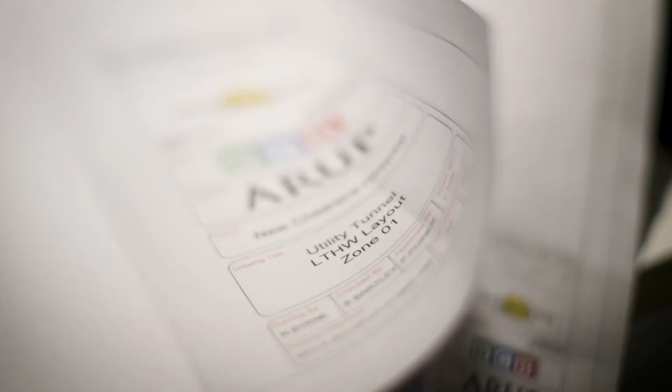I heard people say that this couldn't be done. It'd be an almost impossible challenge to do what we had to do. But our job is to make that possible.

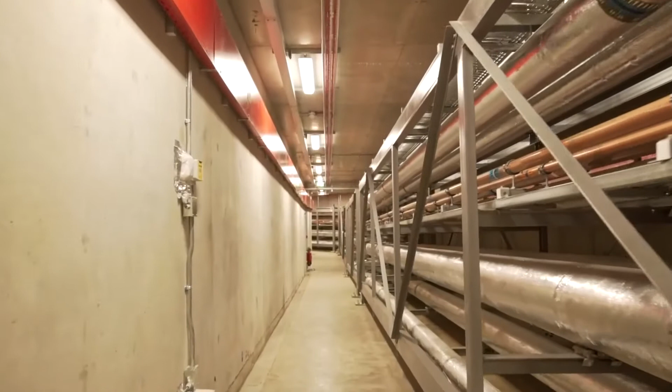When you're finished the project and the hospital opens and you stand back and you look up at it, particularly when you look up at this hospital now, and you say, I was part of that, it's really something actually, and it feels like you're leaving a bit of a legacy behind. So I'm happy to keep doing this potentially for the rest of my career.

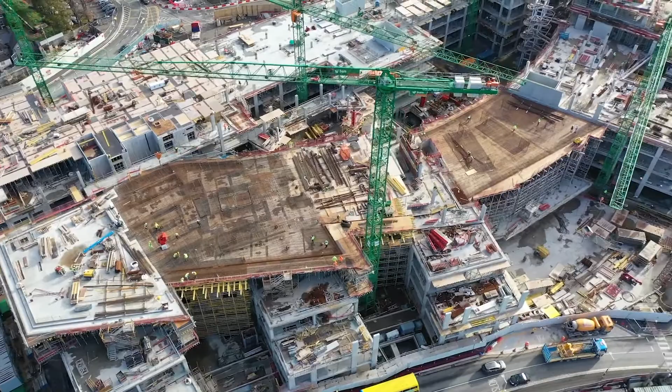It's a long journey, but in the end, you just have to think about what the finished product is going to be and how wonderful it'll be. This is a standout project in the career of any engineer. You get a sense sometimes of how important what you're doing is.

Ultimately, our client is the children of Ireland and everybody in Ireland, their parents as well. I have young kids myself, and the facilities that are there for them at the moment are not really what we would like them to be in this country. So that's really why we're doing it.

Someone asks you, what do you do? Oh, I work in the children's. Oh, the new children's hospital. Yeah, everybody knows what it is, and though they may not say it, everybody knows how important it is. I think they talked about building a new children's hospital in Ireland for 40 years or so.

And I've always loved healthcare work just because of that. It's complex, it's technically challenging, but also it has that social usefulness aspect to it. You very much feel when you're building a hospital that you're doing something that's for the greater good.

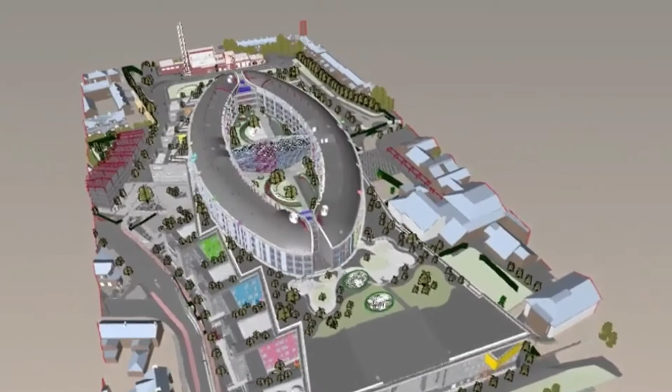But you get a sense sometimes of how important what you're doing is and what it will be, and now you see the building coming up higher and higher out of the ground. You get a sense of how grand it will be when it's finished.

So what Jones Engineering bring to this project is, number one, we bring experience, but more than that, we think we bring a culture, we bring passion, and it's a passion to solve problems. It's a passion to get things done right the first time, to come up with a better way to do things. We're always looking to see, can we innovate and can we come up with a smarter way to do something.

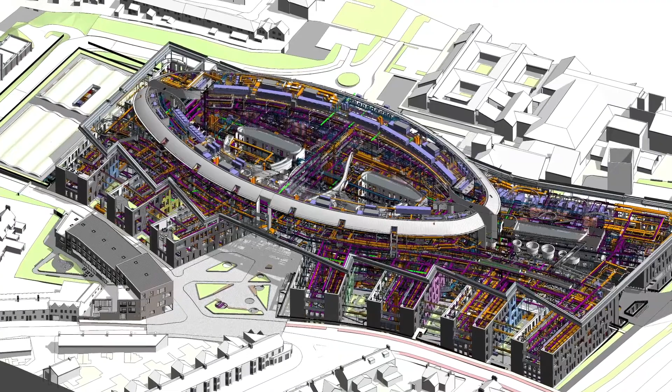But it's also a passion to hand over a project that at the end of the day is a world-class facility to the highest standard.

I think my advice to young engineers who are about to graduate is don't limit yourself in what kind of job or sector you've studied your engineering in. They're all quite versatile and flexible. You can switch from one side to another. It is going to take a bit of learning and getting used to, but you're well able to do it. Definitely just don't limit yourself to just your degree and only your degree.

Ultimately, a consulting engineer solves problems. So clients will come to us with problems or challenges. They may want to build a building in a certain place, or a bridge, or design a table, or anything. And it's our job to decide how that might happen.

Can it happen in a cost-effective manner? What are the stages it would have to go through, from concept to detailed design to figuring out a price to production, all of those things. So yeah, ultimately our job is to solve problems.

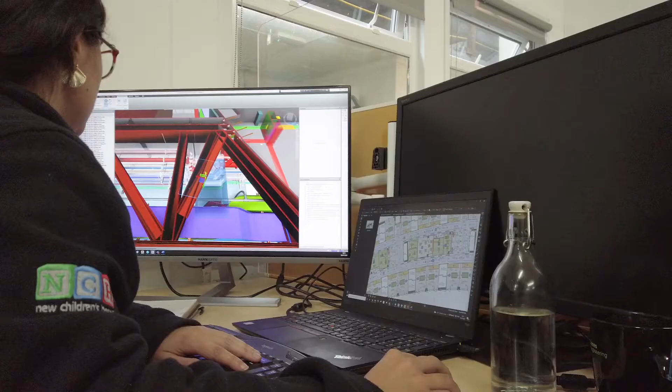I think that many times when we finish college or university we are all very excited about moving into the real world, and sometimes we do believe that we know everything, but it's not really true. Actually, you learn the concepts and you kind of learn how to think, and then you come to the real world, and you are constantly learning stuff.

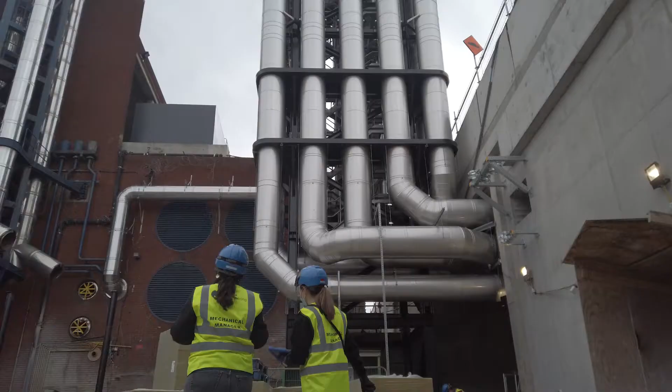And if you have good managers who help you, and we have them here, you will start having small tasks, and then eventually they will start giving you bigger tasks, not really on your own, but they give you that freedom of, okay, you have to do this, any question, let me know, but you have the freedom to do it your way.

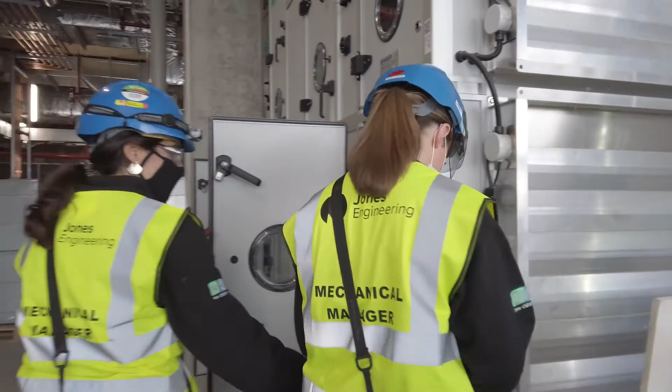You have to learn how to allocate time to different things, because there are different jobs within this project, like as a project engineer or as a coordinator, or you have to be interacting with many subcontractors, different trades. You see that it's a huge hospital, and there are many people involved.

I remember when I was in college, or leaving college, I didn't really understand the different roles that were out there in the industry. You could be a consulting engineer, you could be a contractor, you could be a manufacturing engineer, you could be a technical sales engineer. I had no idea what they were. I didn't know. My first job was a technical sales engineer, and I just saw it as an engineer, you know. And that turned out to be a really interesting job, which I did for a couple of years.

But ultimately, the difference between the roles is consulting engineers predominantly design. It's more office-based. We spend time on site. As you can see now, I'm on site and have been here for quite a while. But predominantly, we're office-based, and we produce designs normally in the form of drawings. And then our colleagues, the contractors, actually take our designs and make them into a reality by turning them into fabrication drawings, constructing them and managing the works on site. So that's the fundamental difference between consultants and contractors.

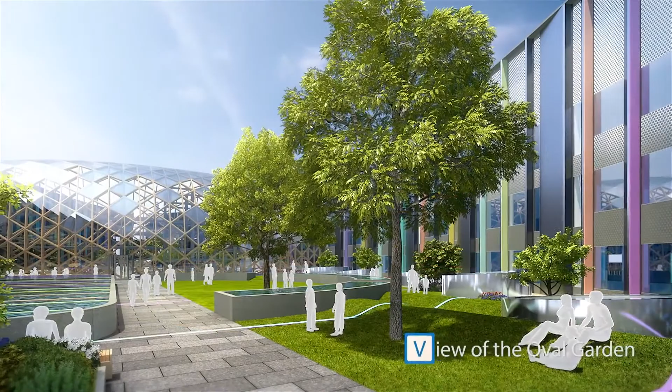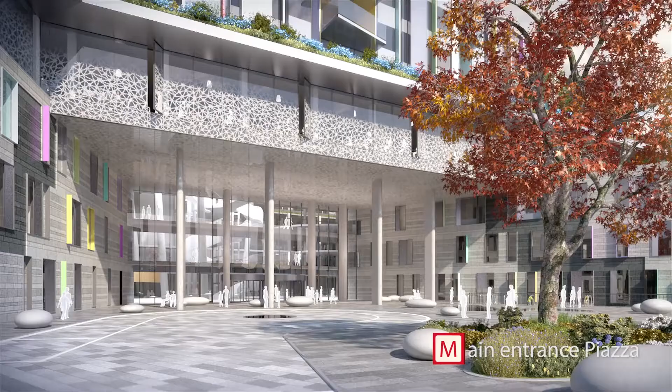And I think it's a departure in the design of hospitals in terms of it's all single rooms, so there's no wards. So there's lots of privacy for the children and for their families, and in each room there's a bed where a parent or a friend can stay the night comfortably, and that's really important as well for children. And the whole design is very much focused on their well-being, with lots of light and lots of outdoor space, and all of that hopefully would help the healing process and help them feel more at home and more relaxed in a hospital environment.

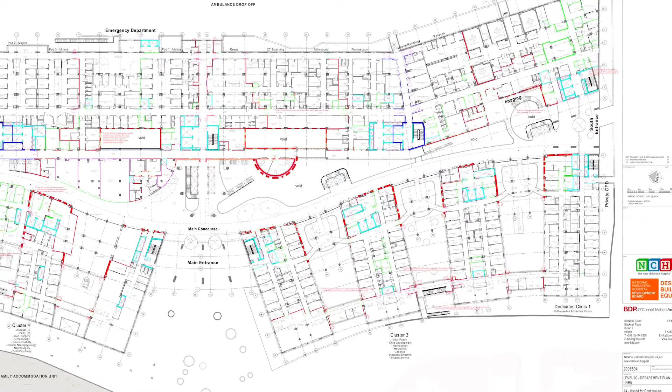So just a little bit about the project itself. I think I mentioned already, I've been personally working on the project for 6.5 years, and I'm really proud to work on the project. I know Arup as a company, we're really proud to work on the project. We pride ourselves as a company that does socially useful work, and no better work to be doing than delivering a hospital. It might sound a bit corny, but I mean that it's really interesting and fulfilling work to do. I could be delivering different types of projects if I wanted, but I've worked on hospital projects for most of my career, and I think I'll continue to work on them for the rest of my career.

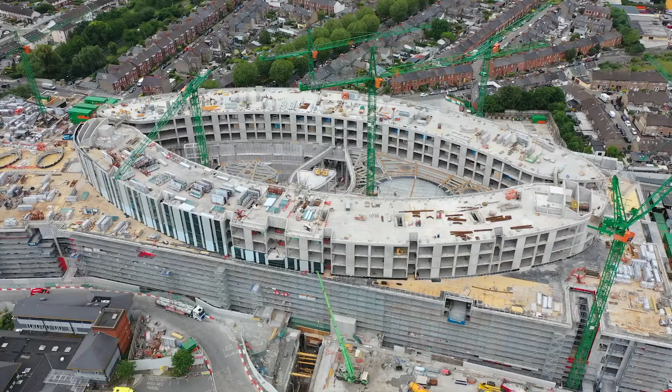They really are interesting projects. They're very technically challenging. They're very complex projects to work on, and when you've finished the project and the hospital opens and you stand back and look up at it, particularly this hospital now, and you say, I was part of that, it's really something actually, and it feels like you're leaving a bit of a legacy behind. So I'm happy to keep doing this, potentially for the rest of my career.

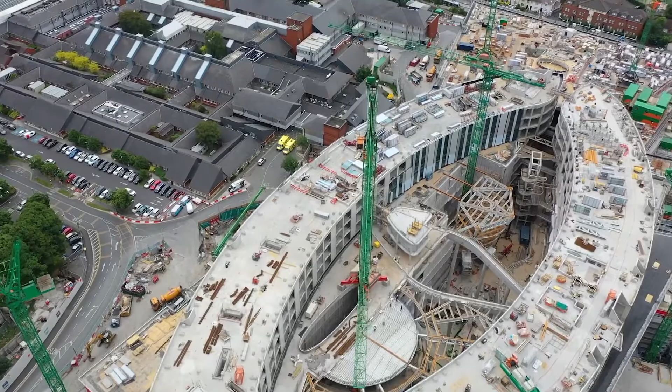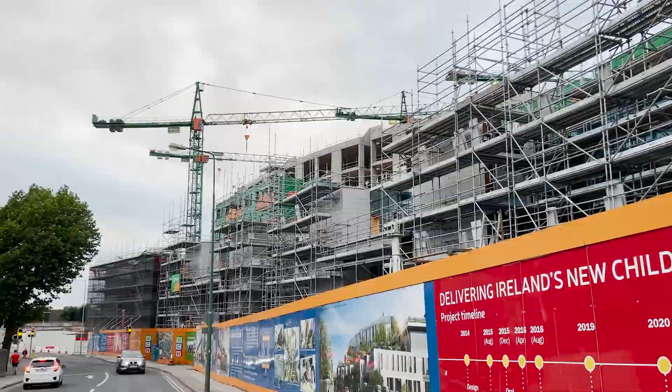The hospital itself, this project, I'm not sure people understand the complexity of it and the enormity of it. The building itself is 160,000 square metres. It's got 6,000 rooms. If you try and imagine 6,000 rooms, that means there's over 25,000 internal walls. Those kind of numbers make the mind boggle. They don't mean an awful lot to people. Your average house, for example, is 150 square metres. So it's over 1,000 of those.

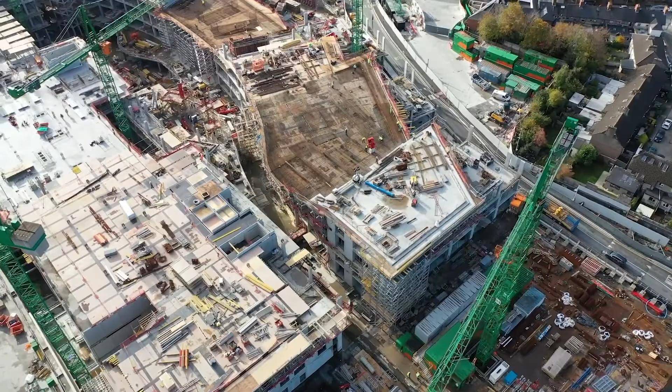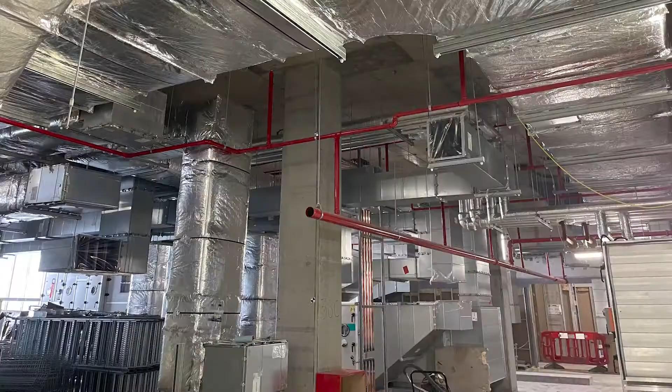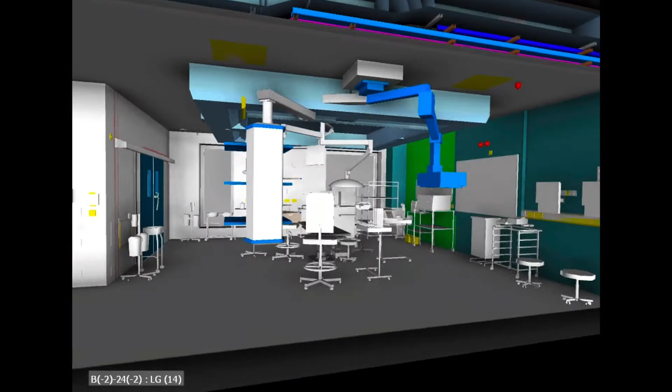So it's our job as designers to design all of those services for the hospital, from the plant rooms right up through the distribution, to get them to rooms so that ultimately patients, who are our ultimate clients, are getting the treatment that they need. The building has over 5,000 rooms. There's 22 operating theatres. There's over 80 isolation rooms. There's 130 air handling systems. There are over 30,000 data outlets in the walls. The building is phenomenally complex and really interesting to work on.

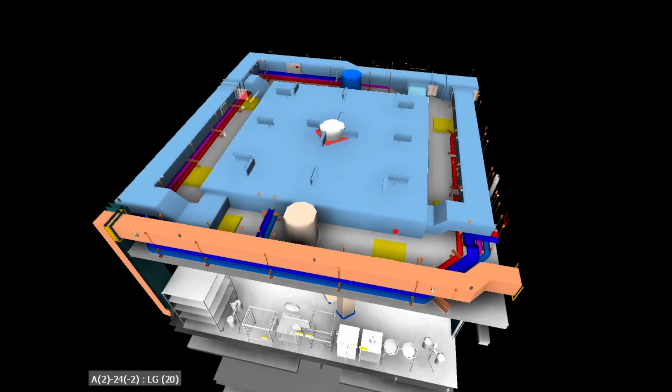If you're an M&E designer, I don't think there's much that a hospital hasn't got. It's got offices, it's got operating theatres, it's got ICT rooms like data centres, it's got kitchens, it's got restaurants, it may have a cinema. It has everything really that you could want to design, and plenty to keep you interested.

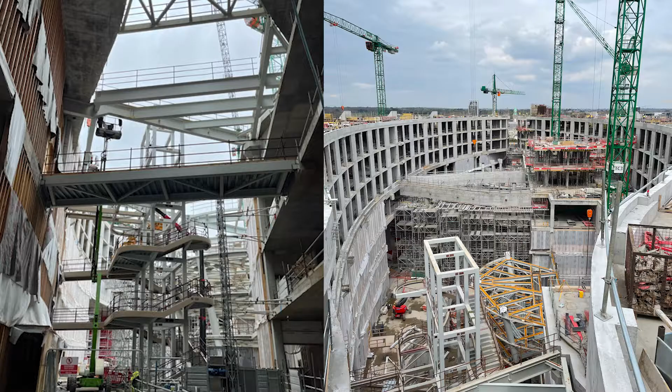So Arup were appointed to start work on the Children's Hospital in 2014, and I started working for Arup on the project towards the tail end of 2014. So it's a really important commission for us, and it's a project that we're really proud to be involved in and committed to delivering. It has been tough at times, but we're really seeing the fruits of our labour now out on site.

The building is now up to level 7, so the structural frame topped out last month, which means that the superstructure is largely complete at this stage. And that's something to say as well.

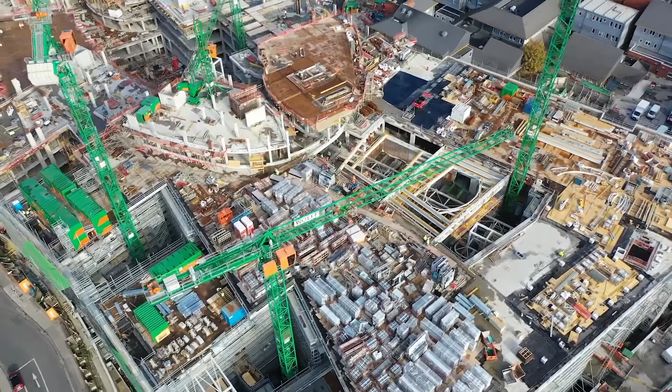Over the years, we've had plenty of social events. The team working on this project, the guys in this building, as well as our own office and in BAM's and Mercury's offices, we've all been working together for a long time now. And we're okay, we have our disagreements, but we work together well the majority of the time, and we really enjoy it.

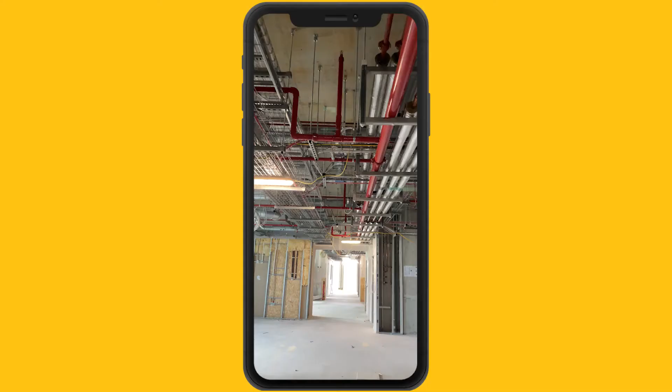So the M&E fit out now is reasonably well progressed. It's probably 20% through at the moment, and there's quite a way to go, but there's a lot of activity out on site now, so it's quite an exciting time to be based on site. And as you can see with the Luas going by now, that's one of the things we have to deal with.

Yeah, so the location here was certainly challenging in terms of the footprint that was available for the building, and it was well, I suppose, publicised that there was doubts about the site and whether it was the right site for this building. And it's not our role or my role to question the site itself or the location of it. It's our role to come up with solutions to make the building work on the site, and in fact to make the site work for the building as well.

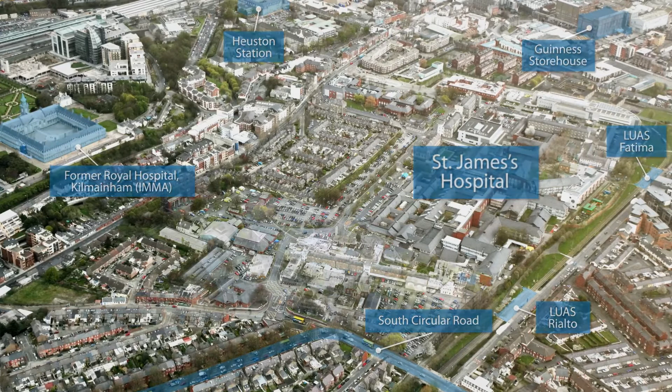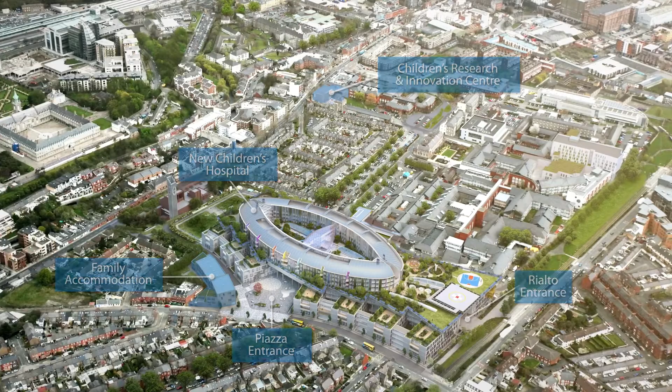The site, obviously, it's a live hospital campus. So there's hundreds and thousands of patients coming into this site on a daily basis, and St James's Hospital could not be affected by anything that we had to do. We couldn't shut down the hospital or any part of it. They had to provide service to patients 24/7, as they do always.

And the really unique part of the piece of work that we're going to talk about today is there was a utility tunnel that connected the St James's campus to its energy centre, which is, if you think about it, almost like an umbilical cord, and it transfers all of the critical services from where they're generated to where they're needed. So that's power, keep the lights on, keep all of the machines on, it's heat, it's steam, it's medical gases, it's oxygen, that people are acutely aware of how important oxygen is these days, and nitrous oxide,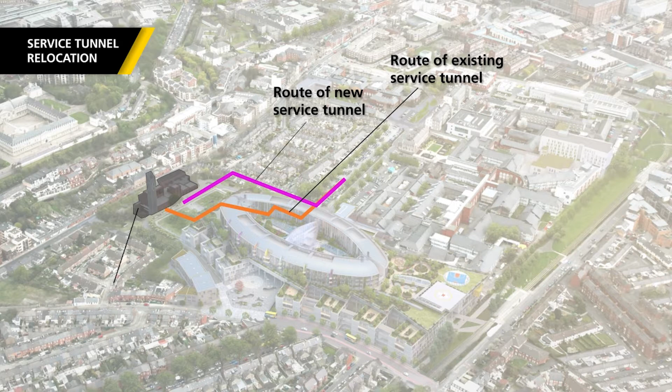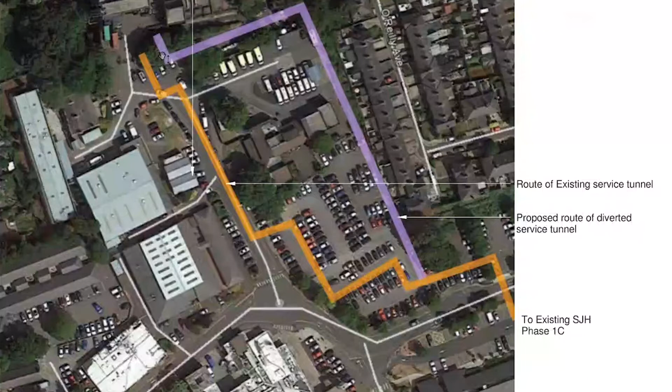and various other critical services. And the problem that we had to work together with Jones Engineering to solve is that this tunnel ran through the site for the new Children's Hospital. It ran underground and directly through the route where we needed to excavate to get this building started. So before we could even start, we had to crack this particular challenge. Initially, it's about coming up with a concept, right? So that's really our role at the start.

I heard people say that this couldn't be done. I'm pretty sure I read it in the newspapers actually, that this couldn't be done, that there were so many critical services, the Drimnagh sewer and the utility tunnel running through this site, that it just wasn't suitable for this hospital, and it would really be an almost impossible challenge to do what we had to do. But our job is to make that possible, right?

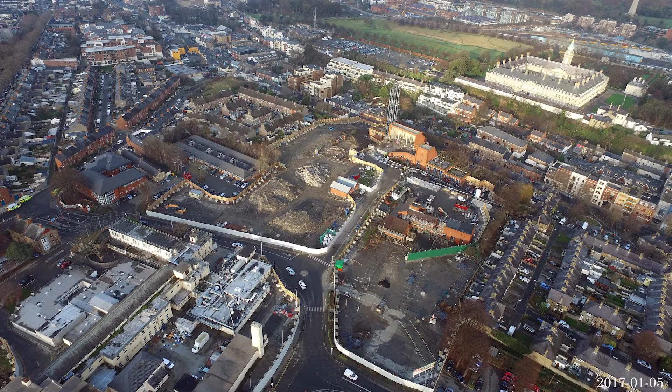The first thing that we do is we go and visit site. So it's hard to imagine, but there was a first time that I visited this site, and it was about 6.5 years ago at this stage. It was cold. I remember there was 22 old buildings on the site where the hospital is being constructed now, and there was obviously this utility tunnel running underground through the hospital. So the first thing we do is we go out, we survey the site, we familiarise ourselves with where everything is, where everything connects into.

Obviously we bring in some specialist companies to help us survey underground to try and figure out where everything is going, where it starts, where it ends, and that allows us to build up a picture of what the specifics of the problem are.

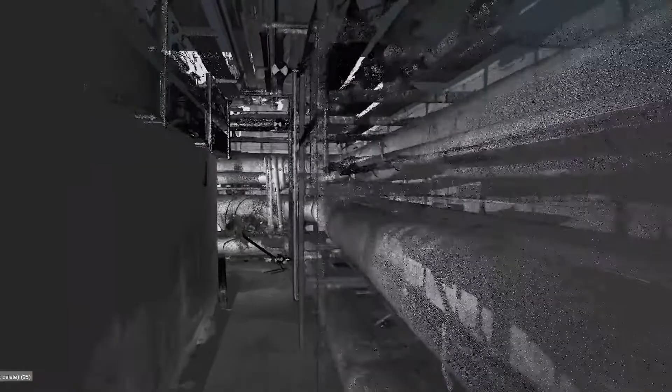And I often think it's almost like a photograph that has very poor resolution. So we start with a concept which is the bones of a solution. It's not very detailed, the resolution is not very good, and as we move through the stages of the project, the resolution gets better, gets better, gets better. So we learn more, we provide more detail, and by the time we get it to the stage where it's ready to be constructed, we've got pretty much all of the detail. We've got everything that the contractors need to build.

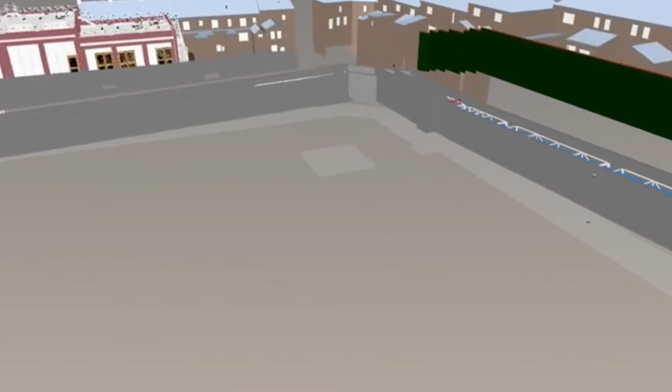So yeah, there would have been an initial information gathering stage, let's call it that. And ultimately, if we imagine a situation where we have an underground tunnel running through a site that we need to clear, I think any of us here could come up with the initial concept. The tunnel has to go around the site. So we looked at a couple of potential routes as to where it would go, and we decided pretty early that the tunnel needed to run east to the northeast corner of the site, and then south to join back up outside the footprint of the new Children's Hospital. And so that was the initial concept 101.

What we had to do then is try and understand, okay, now I've got an idea, is it feasible? So we need to produce what people refer to as a feasible generic design. So it needs to work, it needs to be possible, and it's based on generic components. So we can't specify it must be that exact type of machine. We've got to be able to do it in generic terms so that the contractors can procure from different sources. Okay, that's something we have to work within.

So now we've got an idea and we start to develop: are the levels correct? Can we get the tunnel physically far enough underground, and will it bump into anything as it's coming along that route? And if it does, how do we divert that? So we go through a whole stage of working with other consultants then. We work with the architects, the civil engineers, landscape engineers to try and figure out if our initial concept is actually feasible.

So where could we start the tunnel? It obviously needs to come out of the energy centre, because that's where everything is generated. So is there a part of the energy centre that's in the right place where we need to come out? Is the energy centre deep enough to come out? The levels are the slopes and the depths of the ground and so forth. The new building was obviously going to have quite a big basement, and we needed to come out very low, much lower than the existing tunnel was.

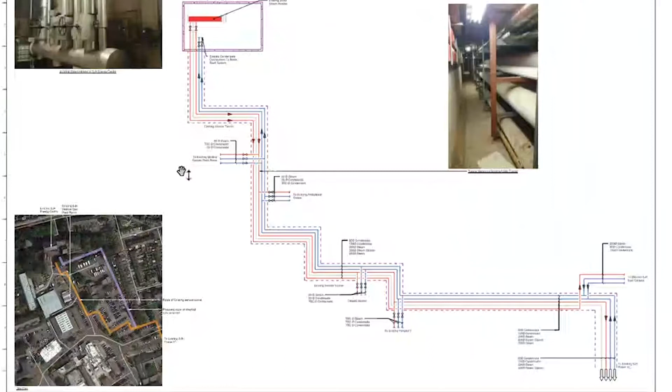And so we had to survey the St James's Energy Centre to see, is there a part of that building that's low enough that we could feasibly break through the wall from underground and create a new tunnel and connect everything back. And we determined there was, we picked a location, and we came up with an initial set of concept design drawings, which we used predominantly to agree the scheme design with the key stakeholder at this stage, St James's Hospital campus, because they own the services, they're keeping their hospital live, we're doing open heart surgery on it effectively. And we needed to get their agreement with everything that we had to do.

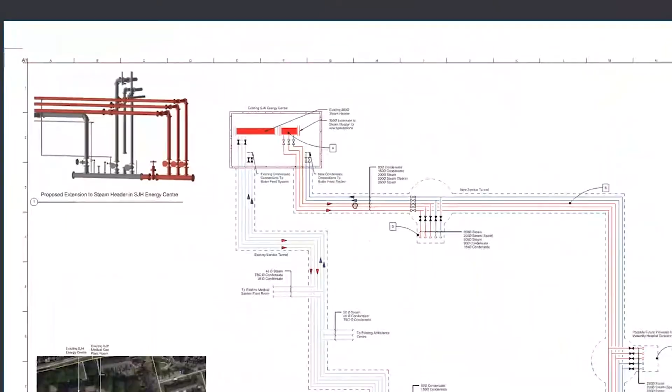We produced an initial set of concept drawings for all of the main services, so for the electrical services, steam, medical gases and so forth. And we set them up in a way where we showed schematically existing, next page would be proposed intermediate stage, and the next page would be the final stage. It's very basic, but you could flick from one sheet to the next on a projector, and it was very clear to this client what was changing at each stage.

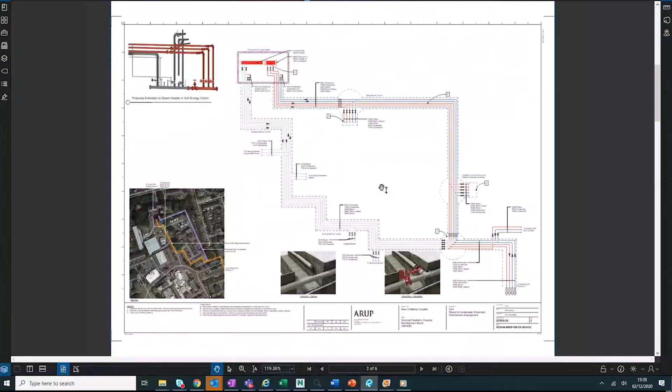So we would add a new bit, we would make a connection here, we would run services here, we would make a changeover at this point. And we had to demonstrate to St James's that we could do it in a way that would be safe and that it would not cause an interruption to their operation of the hospital. That was just a no-go. We could not interrupt the services.

And we had to give them confidence that we had designed it in such a way that this could be carried out as we had designed it. So we sat in long rooms like this with our drawings up on the screen. All of the people from the St James's Technical Services departments, their Director of Capital Projects, all of the key people over there, including clinical people as well. So you would have some of their clinical engineering leads and people who understood what it meant if their oxygen supply turned off, for example.

Yeah, so to give the St James's team confidence that the solution that we had come up with was buildable and could be implemented in the timeframes that would avoid any downtime on their systems, we collaborated with contractors prior to having the meetings, and we were able to demonstrate that we had thought through the turnaround times for controlled shutdowns and for switchovers between one service and another service and backup services and that type of thing.

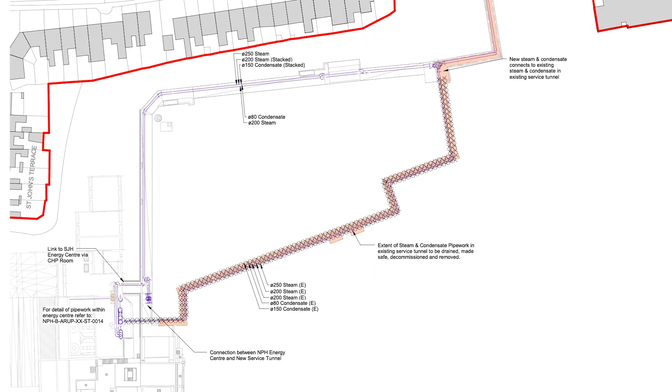And with public projects, the way they're procured, you've got to advertise it online. You let contractors tender for it in a fair way. And we need to produce a very detailed set of design drawings now, or tender drawings as we refer to them, so that all of the contractors get all of the same information and that they get a period of time to assess those drawings, measure them and come back with a price.

So all of the contractors submit their prices for the work, and the contractor with the most economically advantageous tender wins the project. So not necessarily the cheapest, they have to demonstrate that they've thought through the methodology of how they're going to approach the works, and they get points for that, as well as getting points for having an economically attractive tender as well.

So we need to take our concept drawings at this point and develop them into something more detailed. So we need to add all of the valves, we need to add all of the right pipe sizes, we need to add all of the material specifications, we need to add all of the accessories that aren't necessary at concept stage. So when we're agreeing a concept with the stakeholders across the road, they don't really mind if there's 2 sets of expansion bellows or 1. They just know you've got to have them, you've got to have thought that through.

But for tender, you've got to have designed all of the valves, all of the accessories, so that they can be counted and all of the contractors can price them in a fair and an equivalent way. So it's taking the concept and it's developing it into a detailed set of drawings that plugs all the gaps.

And as well as your drawings, you produce specifications, which are documents which list out all of the material specifications, all of the constraints, all of the duties that the contractor must carry out, everything which will cost money effectively, and everything which is required to complete the work. So we prepare a big pack of drawings and documents, mechanical and electrical, which go together and they're sent to the contractors to price.

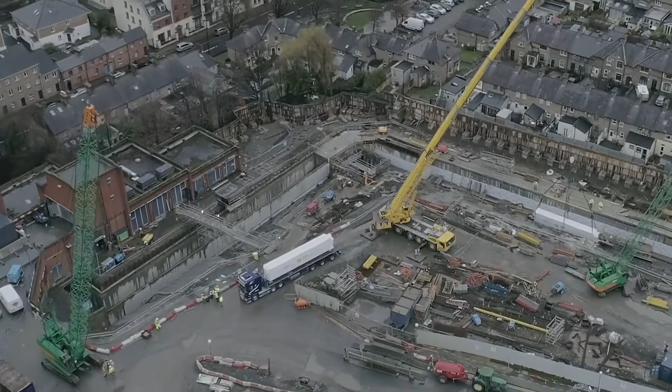So currently we've a team of about 350 people working on the project, and it's this team of managers and engineers and craftspeople that actually make this amazing project possible. I had worked with Jones Engineering on the St. Vincent's Private Hospital project a number of years ago, and that was a very successful project. So we were delighted when Jones won the contract on the Children's Hospital, and we knew that the quality of the work in particular would be to the highest standards.

And I think that Jones hold those values. They want to walk away and leave the thing running well and not have any comeback at the end of the day. And again, realize the importance of a hospital project and making sure that everything is working and that there isn't downtime. So I think working with the contractors brings that buildability element.

Sometimes as designers, the kind of physicality of how you actually fit something in, how you put something together and how it fits in the space is not something that we'd be as strong on. And so it's great when the contractor comes to the table and the whole thing starts to become real. And Jones certainly brought their skill in prefabrication and modern methods of construction to the table, and looked at what we designed and saw how it might be tweaked to make it more easily constructible or more easily prefabricatable. So the terminology we use is coordinated.

And the terminology in the industry is the consultant produces feasible generic design. Which, as I said, is a design that can be built, is based on generic equipment, and then the contractor takes that and turns it into a specific set of construction drawings. So it's fabrication drawings based on specific products. So he will actually know exactly what valve, exactly what brand of pipework, exactly what type of pumps and fans and so forth, and they load all of that into the design now.

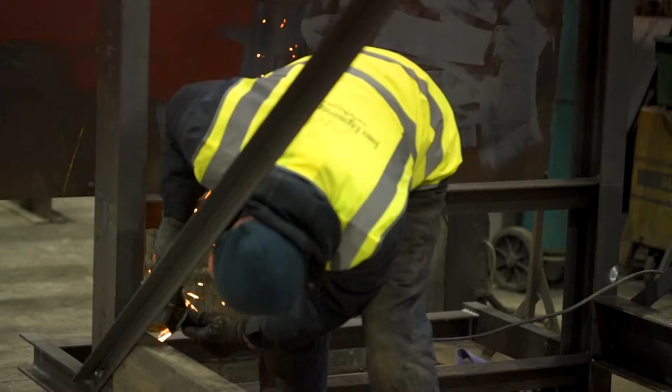And if you take the likes of the utility tunnel that we worked on here, the major concept really was modularization, and that's mainly based around speed. So are you going to just get all the materials delivered here to site, or are you going to actually get them delivered elsewhere, actually put hours in off site and bring finished elements to site? And it sounds slightly trivial, but that's a major decision you're going to make.

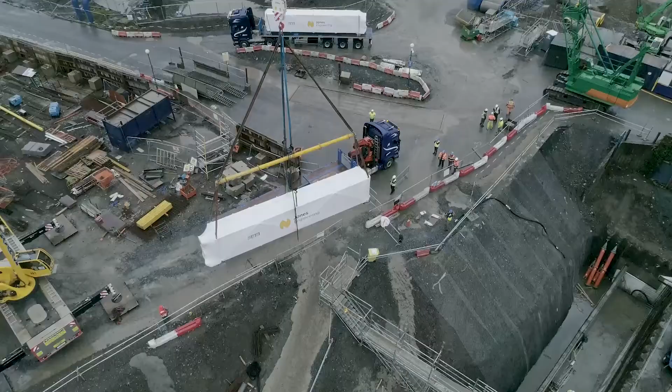You're going to need off-site premises, you're going to need insurances, you're going to need logistics, additional transport over and above. The level of coordination that's required is going to have to be probably an order of magnitude higher, because everything has to come correct. There's no bring it here and sure we'll fix it, but that just defeats the purpose of what you were trying to do in the first place.

So more and more as the industry tends to go in that direction, the more accurate you have to be. People coming straight out of college, there's not really much time to come up to speed. You got to kind of be there from the get-go and get in with a more senior engineer and do your best to play catch up and roll with them. Yeah, so one of the things that we try to employ when we are doing a review of the design is a simplification of it.

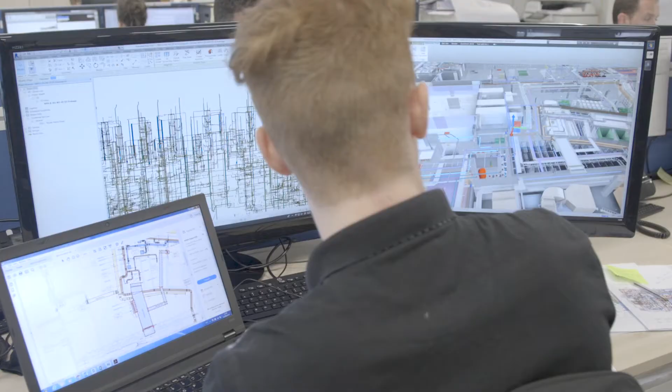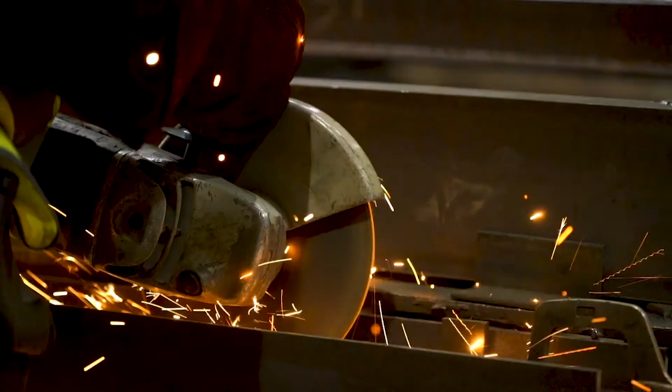A pipe that runs in a straight line is far simpler and easier to install than one that has multiple changes of direction in it. From a cost point of view, but also from a system operational point of view, there are benefits to everyone from a simplification.

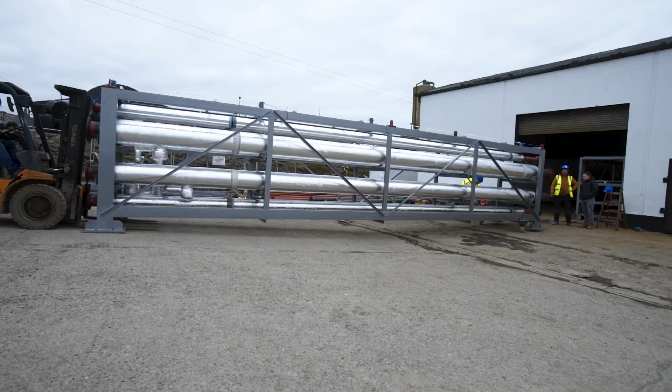And that really leads into how we think about offsite fabrication, where we're endeavouring to provide compact, repetitive items delivered to site, high quality, low issues, and the simpler that we can make these things, the easier it is to repeat them, the fewer issues you can have with them, and that just leads to higher quality and reduced time overall, really.

To facilitate the speediness of the shutdown works, we needed to prefabricate as much pipework as we can. Now, in an already installed environment, it's very difficult to provide accurate prefabrications because you're relying on what you can see and measure and the accuracy of that.

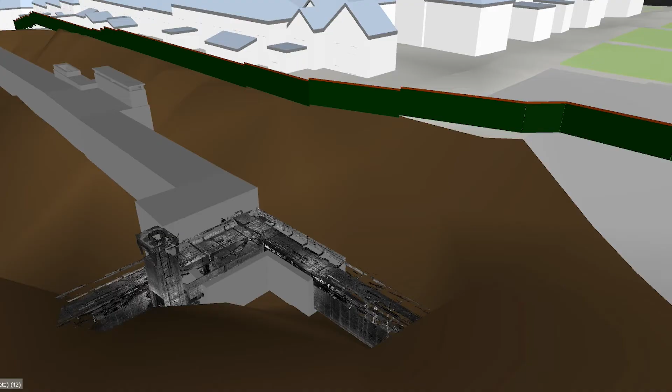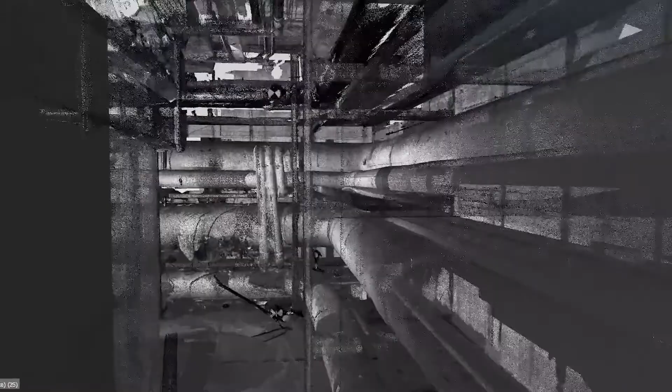So the entire junction where the cut-in was going to take place was 3D scanned with LiDAR, and this provided us with an accurate base point that we could insert into our model on top of that, and we probably saved in the order of 4 to 6 hours of work on site, and that's 4 to 6 hours of real time of a hospital losing their heating system that was saved.

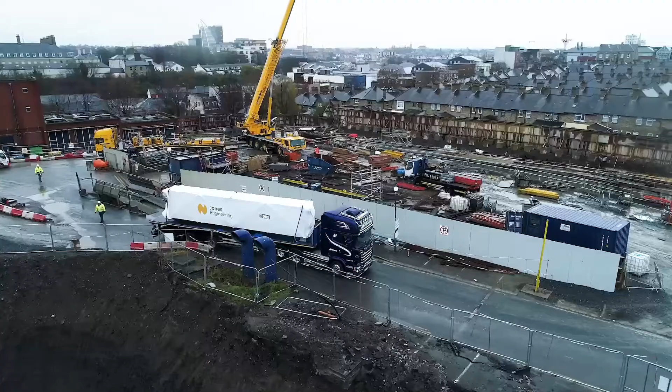So in the case of this project, off-site manufacturing was deemed an absolute necessity over a nice to have, due to a number of factors, the restrictions in and around this relatively tight site, but also, and more importantly, from a quality point of view, where it's far easier to control quality in a controlled off-site fabrication facility, and the number of other factors that go along with that: reduced health and safety concerns on site, reduced issues due to inclement weather.

One of the most critical things that was identified early on was how the diversion of the steam systems would be handled. The steam is used to provide heating to a large part of the existing hospital, as well as hot water services, and as you can imagine, turning these systems off is life safety critical for patients. So it had to be handled in a very controlled manner. This was done through writing a very large method statement document about how the process would be done and how it would impact on the hospital especially.

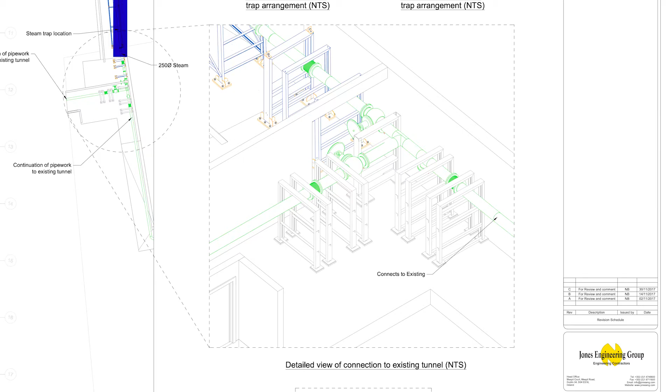There was a location identified where the two tunnels will connect, and at this location we had to cut in several T's and valves to be able to facilitate the diversion at a future point. And this was done over the course of 6 Saturdays, normally on Saturday nights, to provide the least disruption possible. The hospital identified this as the best time of the week to do it, based on the very low number of surgeries likely to happen on a Sunday morning.

So we would shut the steam system down, allow everything to cool down and the pressure to drop. We would then cut into the pipe at the identified location and add in what was required with the additional valves. This typically took in the order of 6 to 8 hours, and we would work through Saturday night into Sunday morning, maybe finish about 2 a.m. So by 8 a.m., 10 a.m. Sunday morning, the heating systems were available again to the hospital.

And in addition to the steam systems that serve the hospital, the utility tunnel is also home to a number of medical gas services. That includes medical or surgical air and nitrous oxide, laughing gas. So these two systems are critical to the health of the patients within the hospital. And one of the critical milestones that we had to carry out was a diversion of these two gases.

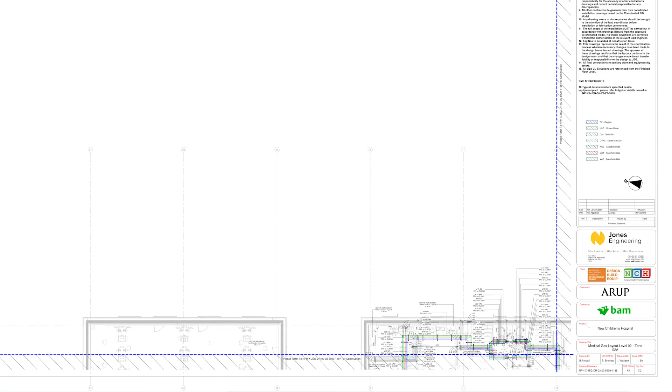So the system had to be shut down, and inside the hospital about 100 cylinders of gas were brought in, and these were all plugged into the hospital locally to provide services to the patients while the works were taking place. Again, in the middle of the night, I think it was finished in the order of 4 a.m. to provide the least amount of disruption to the hospital.

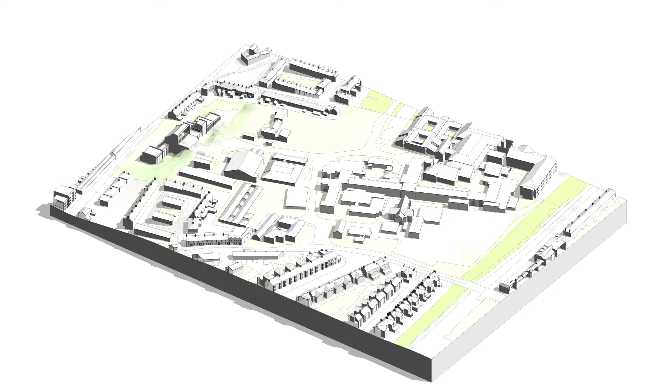The project here is utilising BIM as a resource. More and more the industry is moving towards 3D software as a way to provide accurate installations and reduce issues that arise on site from clashes. And this was the case here.

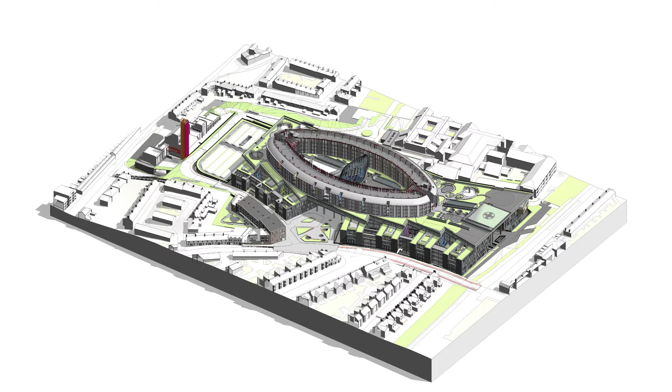The project utilises Revit, but also for the utility tunnel we used another software called Plant 3D to better facilitate prefab off-site. The design concept model that we get from Arup really acts as a schematic, so we know what needs to go where, which is the most important thing to fulfill the design.

The entire services within the tunnel are then each meticulously modelled in 3D, not just the pipes but all of the supports that go along with the pipes. Once it's completed and we're happy that it all works, it flows well and it's as optimized as it can be, it is then broken down into modular sections, drawings are produced for these sections, and then that's taken away and fabricated off site.

But the model, in addition to just providing the information that's required to build it, really gives a level of reassurance and a check on the design that everything works. At the end of the day, a tunnel is a closed box. You can only fit so many things in it, plus you have to fit people in there as well. So it validates at a very early stage that there's not really going to be any fundamental problems on site, and it gives everybody confidence to move forward to the construction phase.

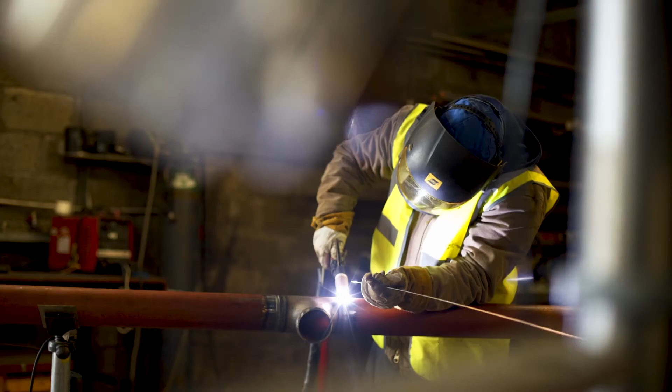One of the key considerations that we have, especially as time goes on, is the reduction of waste and optimization, not just for the environmental sake but also from a cost point of view. So when we look to modularize, we try to use as many standard components as we can. For example, pipe that comes straight from the mills in Asia typically comes in 6 or 12 meter lengths. You can make a module any length you want, but you can end up with a load of offcuts that have to go in the bin. So the actual modules were manufactured around the standard lengths of pipes. It leads to less waste, less work on site, and is beneficial overall.

These models contain so much information, but information is no good if you can't communicate that information. And the currency of communication is still 2D drawings.

In the case of this system, but really in all systems, one of the key considerations for pipe install is how to deal with thermal expansion. In the case of steam, because you're operating at higher temperatures and pressures, this is especially so. The system as a whole is sent out to an expansion specialist, and they provide the critical locations and information about where we should allow for expansion and how we should restrict the pipe movement. Really, it comes down to where you don't want the pipe to move, where you want the pipe to move, and what the loads are going to be.

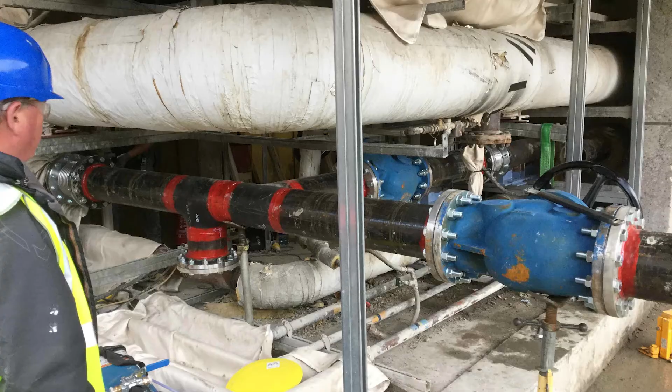A simple example would be where you have an expansion bellows and an anchor in between, and you allow the pipe to expand into that bellows in a controlled way. If you were to not provide any expansion control and simply turn on a system, materials expand and move, but they will do it in an uncontrolled manner that you can't predict, and it could damage the system or an adjacent system. So it's critical that this check is done, and not only done but incorporated from a very early stage, which was the case here, where we can incorporate the expansion design into our modularization. It's just another element that comes to site already complete.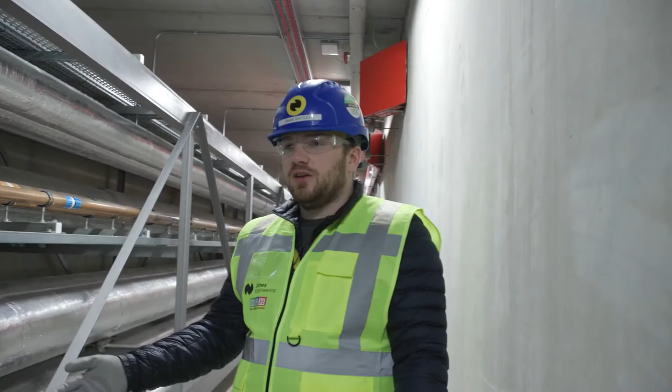So the thermal expansion design that we've mentioned before, here we can see it in action on site. Typically between each of the 13 modules you'll see a set of axial expansion bellows, and these allow the pipe, as it heats up, to move and expand in a controlled manner to a set location. The bellows are guided by pipe guides to restrict any lateral movement that could cause the bellows themselves to buckle. And to the left of the bellows, you see the pipe physically anchored, welded in this case to the frame, to restrict the movement at that location. That setup is typically repeated throughout the entire tunnel.

The real work starts when you have to start installing services on site, and the quantity and the quality of the decision making that you make really will dictate how the project goes.

You have subcontractors or labourers relying on you to provide them direction, and making key decisions to change something along the way, though it may be painful, will ultimately benefit the project in the long term.

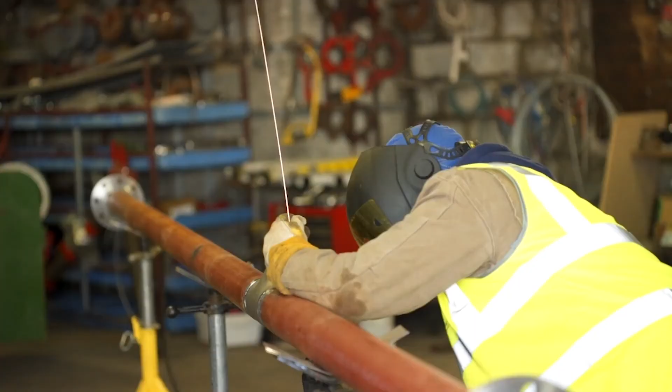So one of the benefits of the prefabrication on this element of the project, given the amount of welding that was required, is a significant reduction in on-site welding. Welding can be quite a slow, laborious process, particularly if you don't have great access to where the weld is required to take place. Being able to do these welds in a workshop means generally higher quality, quicker, and less risk associated with fire. Welding is carried out at great temperatures, and fire hazards on site are obviously particularly important.

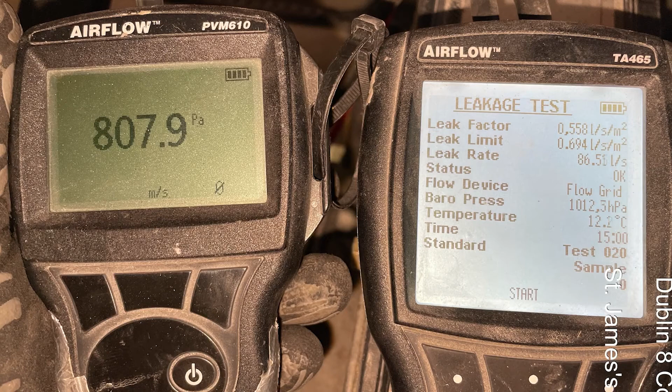In some ways, once the installation is complete, the most difficult work of the project actually starts, and that's the testing and commissioning phase. With any pressurized system, all the systems have to be pressure tested to a set pressure over a number of hours, and this determines if there are any leaks within the system. It's unlikely there would be, given the high level of quality, but if there were, this would detect them and they could be remedied. Once the system is practically complete, you're ready to move forward to the commissioning phase.

In this case, because the existing plant was already live to an operational hospital, this had to be done in a very controlled manner. It was critical that we didn't interrupt any of the service to the live hospital while we underwent these tests. Unlike the shutdowns that we did late Saturday nights, these were going on midweek while there were surgeries and everything else happening within the hospital. So we were satisfied that the system operated correctly. There were no leaks caused by thermal expansion within the system, and we were happy enough to proceed towards the changeover.

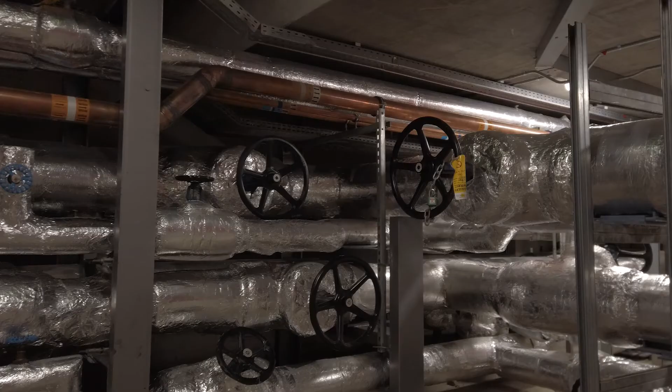And like before, it was done over Saturday night, Sunday morning. The existing plant was shut down. All of the changes were made to allow the system to flow through the new utility tunnel, and it was brought up slowly, and that's very important with steam. Steam, if brought on too quickly, could cause thermal shock to the system, uncontrolled thermal expansion, or steam hammer, which could result in an actual rupture of the pipe. So you're bringing the temperature and pressure up slowly over maybe an 8 to 10 hour period.

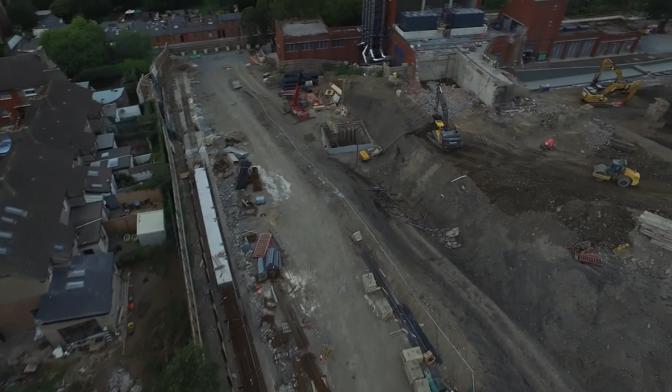At that stage you are live to the new hospital, and all of the services that flow through the old tunnel are now redundant. In addition to that, the med gas and the electrical services are all brought online, and now the links to the old tunnel can be severed, and the old tunnel can be demolished and taken away. Meantime, the hospital has operated regardless, and no disruption to service was seen by any patients.

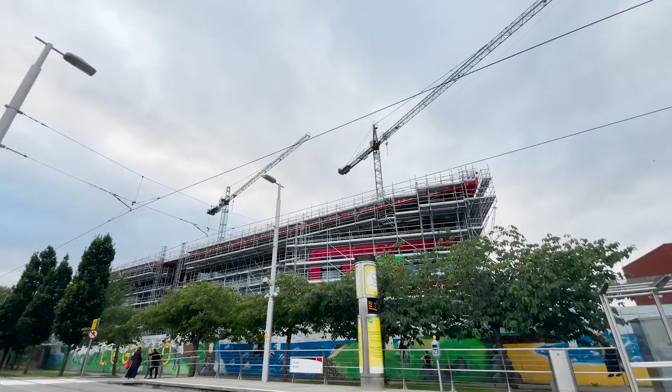Really, the challenges associated with this project revolve primarily around its location. You're adjacent to an existing live hospital. You're in a very busy part of the Dublin suburbs. You've got houses on all four sides of you, very close residents. You've got the Luas going past every 15 minutes, and everyone has to bear consideration towards that. These people will still all be here when the building is finished and we're long gone. So there had to be a rapport built up with the neighbours, and I think it's managed well. We try to do the best that we can in terms of noise, pollution or dust. Certainly by manufacturing off-site, you're reducing the number of bodies here on site, and it all feeds into a kind of holistic way of building.

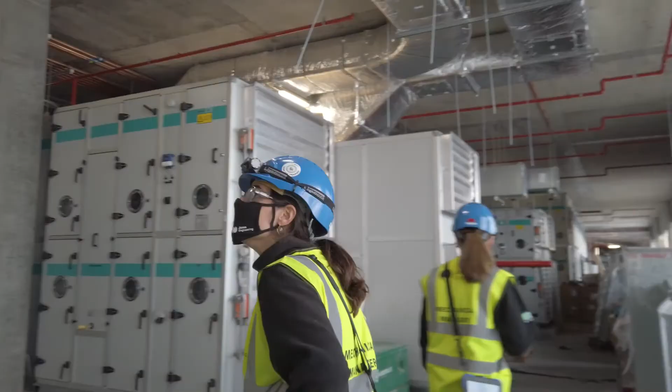What you learned in college is important, very important. It helps your thinking, but don't be frustrated if you don't get good marks, because in the end you are going to go to the workplace. You are going to learn there what you have to do and how to do it, and probably the top in the class of your year wouldn't have the abilities or the interaction with people that another person with lower academic grades has. So just take it as, all right, I have to learn all the maths and everything behind how things work, and try to understand it.

But don't get frustrated if you don't get super good marks. If you are a hard worker and you pass your courses and your degree, and then you go to the real world and you put all your intention in, you will get it. It's just about intention and being eager to learn more and grow professionally every day. That's what I think. So don't be frustrated and move forward. So I think your degree is not your be-all and end-all.

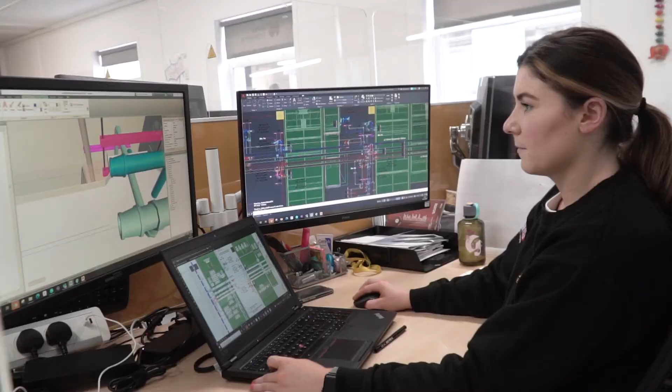So what you study in college is not exactly what you will work with. Technically, what I'm doing now is a lot of building services engineering, which I wouldn't have studied in college. So like heating systems, I would have done water flow, but I wouldn't have done the heating aspect. I would have done small aspects of it, but not at all.

So I think my advice to young engineers who are about to graduate is don't limit yourself in what kind of job or sector you've studied your engineering in. They're all quite versatile and flexible. You can switch from one side to another. It is going to take a bit of learning and getting used to, but you're well able to do it. Definitely just don't limit yourself to just your degree and only your degree.

My advice to somebody that's considering doing engineering would be, I think, just go for it. The options are limitless, I think, at that stage. You have to dream big. Don't limit yourself by what you think you can achieve, because I think with engineering you can achieve anything you want.

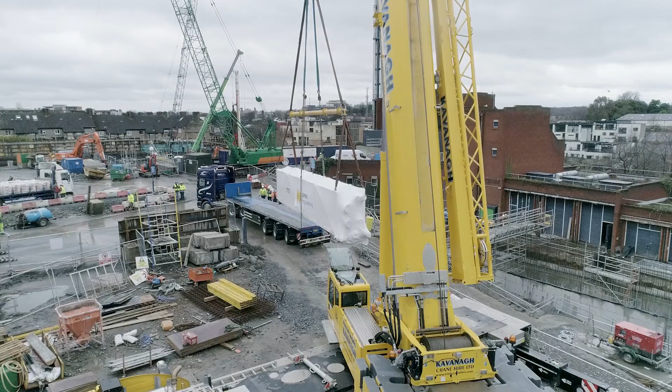Yeah, I mean, there's not a person that asks you, what do you do? Oh, I work in the new children's hospital. Everybody knows what it is, and though they may not say it, everybody knows how important it is, I think. And certainly, we started out 4 or 5 years ago with 3-4 people, and now there's an office here in Jones of 50 people plus the people who aren't even working out of this office.

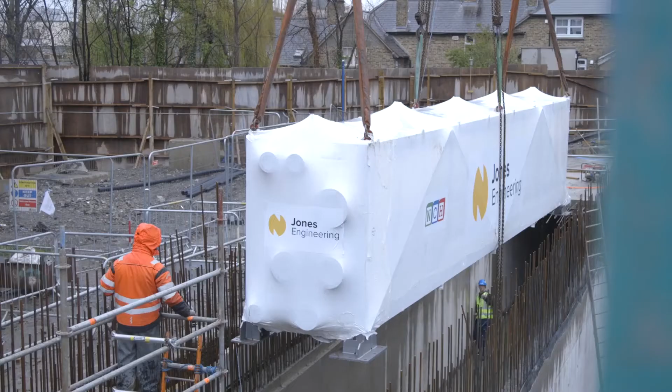And there's a real team spirit, a camaraderie, and a great structure that we have here. It flows well, and I think everybody gets on with everybody else. And from my own point of view, I went from being a relatively new junior engineer to the company to now being a project manager and working with several junior engineers below me. And it's a privilege really to be in that position, because you're guiding people, and it feels like it's important.

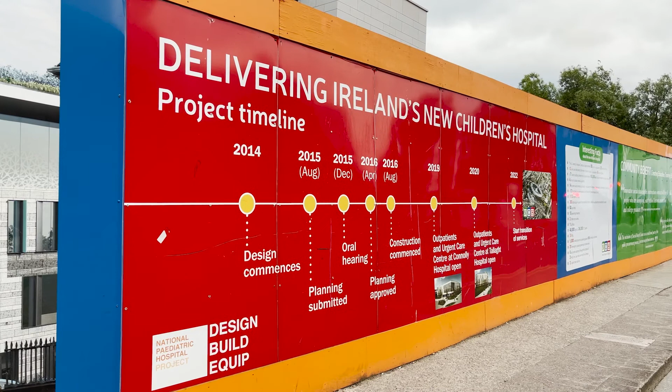Fundamentally, I think every day on this project you're learning something new, and as a result, it's certainly raising the bar, not just for this project, but for other projects that the Jones Group are doing at the moment. And going forward, it will produce a whole new class of engineers that didn't exist within the company before. And whatever the next project is, it'll really stand to them.

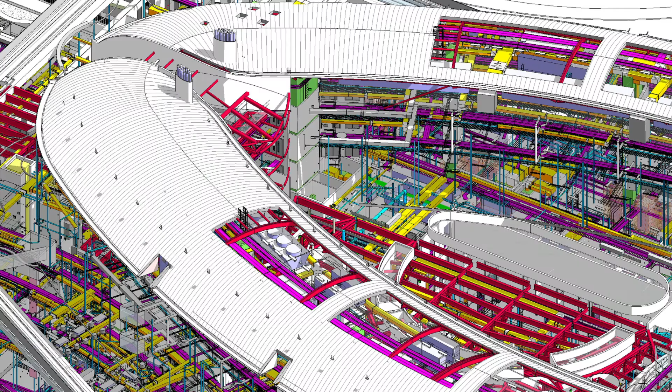What's really exciting to see on the project at the moment is, when you develop a design and you see it on paper, one thing that's important to mention is that this whole building has been designed in 3D, using Revit, using BIM. That's pretty much par for the course nowadays, but bear in mind this project started in 2014. BIM was relatively new back then, so the design has been carried out in 3D, delivered through Revit, and the Revit models are then transferred over to the contractors at the stage where they get appointed.

And it's been really excellent to work with the contractors to see them take our models and develop them through the fabrication process, through the construction process, to take our designs and turn them into something that's ready to be constructed. And that takes a lot of hard work, a lot of collaboration, a lot of good communication, a lot of patience.

There can be disagreements about whether something is going to work, whether something has been set out in the best way for the project, or whether a change is a good thing or not. And there can be conflicting interests at times. Emotions can get high, but we found a really good way to work with Jones Engineering, with BAM, with Mercury, and with other project stakeholders. There hasn't been a problem yet on the project that we haven't solved. It isn't easy, but we get there.

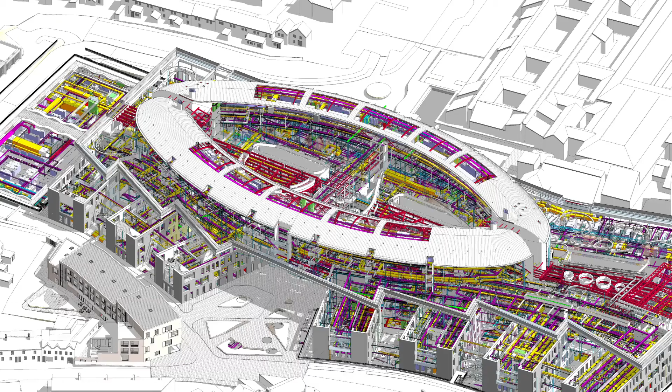I've young kids myself, and I understand what it's like to spend time in the current paediatric facilities. They're just not fit for purpose anymore. The doctors, the nurses, the parents, the children of Ireland most of all, deserve something better. And I think with this project, we as a team and as a company are doing our part to try and help fix that situation. This is a standout project in the career of any engineer. Technically advanced, it'll be one of the most architecturally striking children's hospitals in the world.